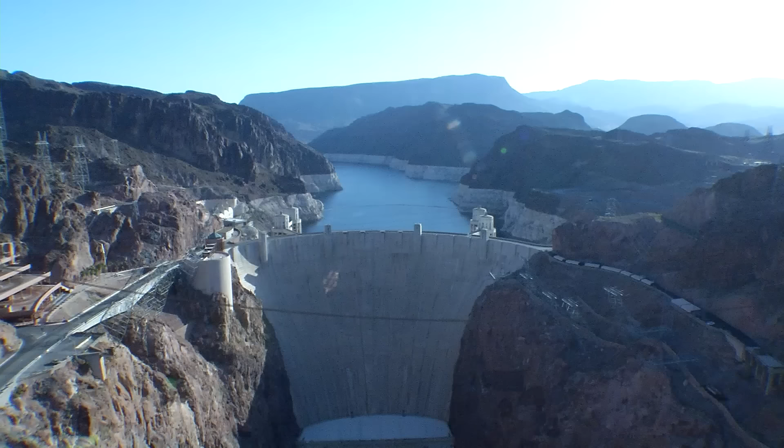Along its course, a series of dams and reservoirs manage the river's flow, delivering water for nearly 35 million people and more than 5 million acres of irrigated cropland. Many communities are dependent upon the life-giving waters of the Colorado River, but none more so than the city of Las Vegas. Las Vegas is located in the Mojave Desert.

Without a reliable water supply, Las Vegas simply can't exist, so there's nothing more important than being able to guarantee that. Nearly 90% of the Las Vegas water supply comes from Lake Mead Reservoir, fed by the Colorado River. But Lake Mead's water level has been dropping, putting Southern Nevada's water system at risk.

Since 1999, the Rocky Mountains have been going through a very severe drought. We've always known that droughts are part of the natural cycle. What's most concerning about the current situation is that we're seeing a natural drought combined with the beginning of climate change.

The lake is now at less than 50% of its capacity, the lowest level since the reservoir first filled in the 1930s. The low water levels of the lake threaten critical infrastructure used to access and deliver water to Southern Nevada. If the lake continues to drop, our upper two intakes will no longer be able to pull water.

So in the face of these declining reservoir elevations, we're constructing a third intake into Lake Mead in order to access water from the coldest, deepest part of the lake. With the drought continuing unabated, construction of the third intake is a race against time.

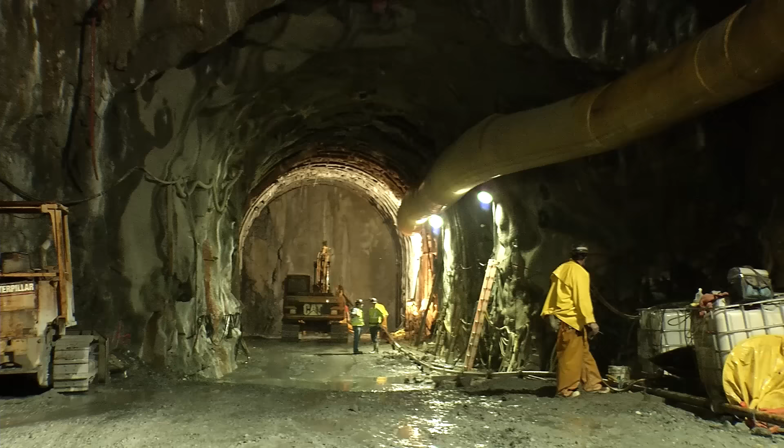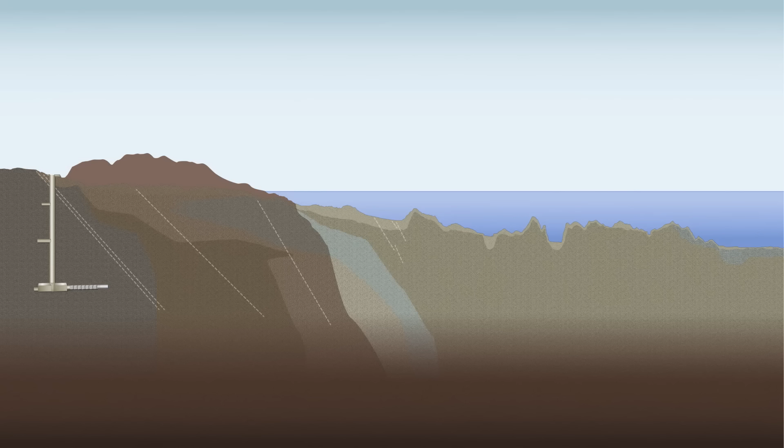Intake number 3 will draw water near the bottom of the lake. Its construction will be one of the most challenging tunneling projects ever attempted. To build it will require excavating a shaft more than 600 feet deep. A tunnel boring machine will be lowered to the bottom of the shaft and excavate a route 3 miles long under the lake.

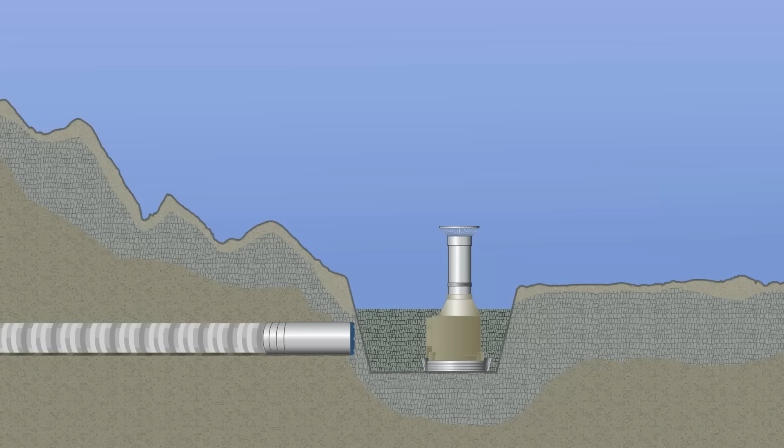The intake structure will be built suspended from a barge near shore, then tugged out on the lake, lowered into a pit, and secured with concrete. Finally, the tunnel boring machine will connect with the intake structure, allowing the lake water to flow through tunnels and pumping stations to reach the water treatment facilities.

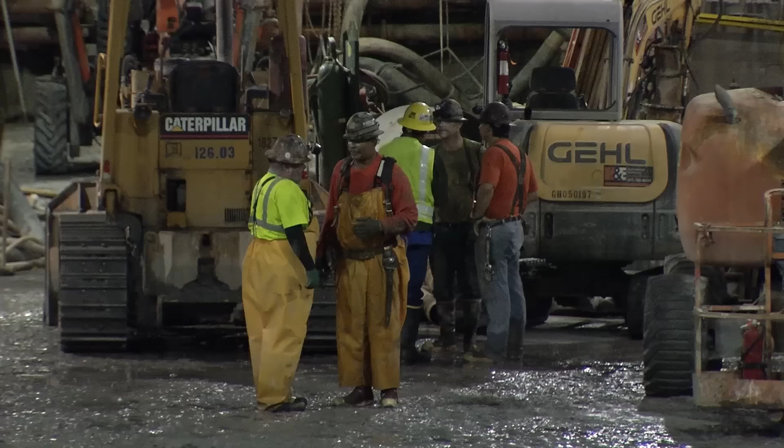Each phase of the project is a daunting challenge, made all the more difficult by the intense pressure working so deep underground and below Lake Mead. The tunnel boring machine will face up to 15 atmospheres of water pressure, higher than any previous tunneling project has ever encountered.

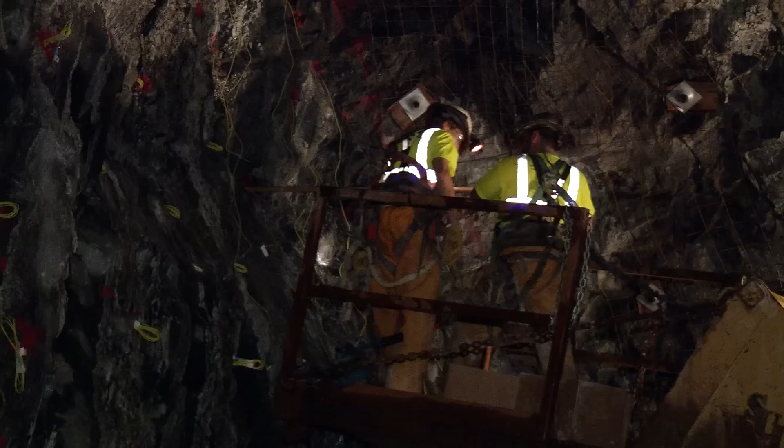The geology of the area poses another great challenge. Unstable rock conditions riddled with faults act as conduits for water to travel into work areas. This concrete, this tremie concrete... To overcome the obstacles of the harsh environment, it will take ingenuity and creative solutions. But it is the perseverance of crews working day and night over the course of 7 years that will lead the team to success.

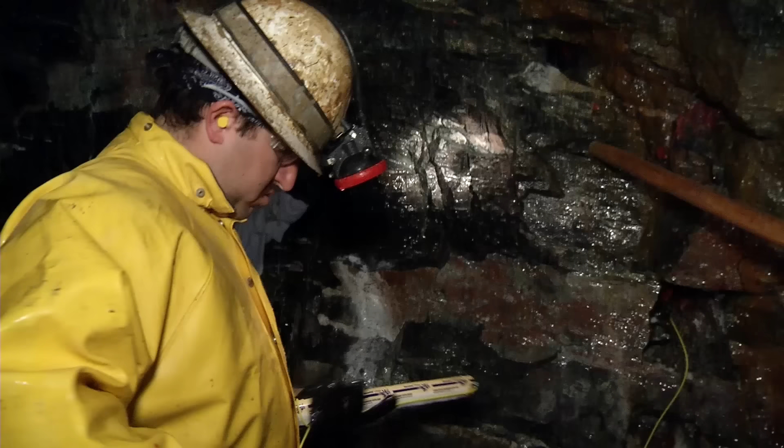Working underground is dark, dirty, and wet. It takes an exceptional mindset to do this work. I like this kind of job. I love being underground. Drilling and shooting dynamite, TBMs. I like it.

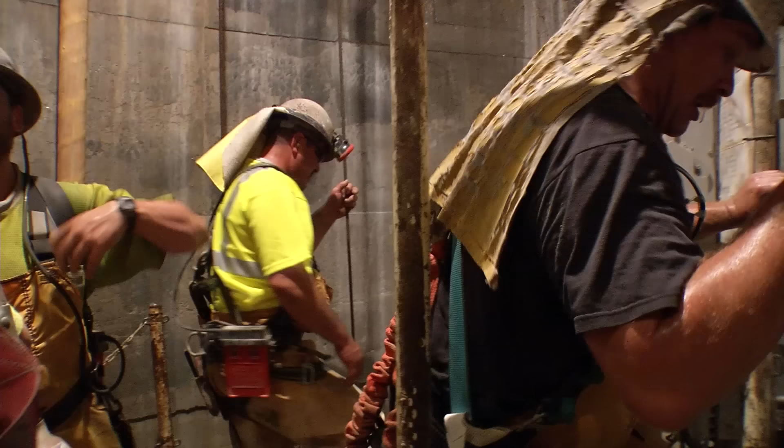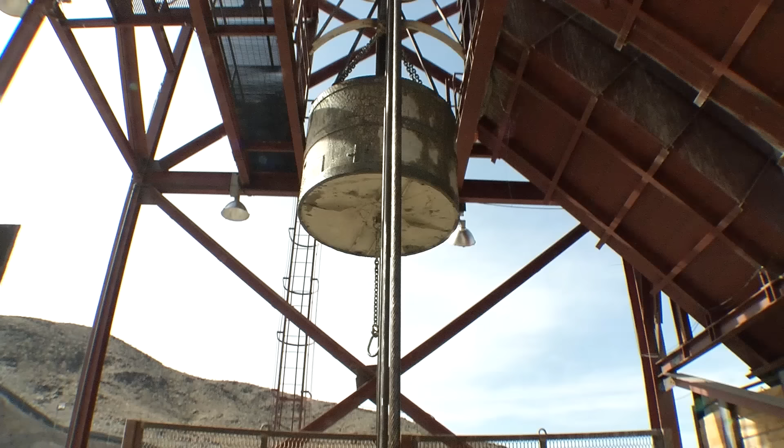To excavate the shaft, workers apply a drill, blast, and muck technique. The first step is to drill long holes into the rock face. Workers then insert dynamite into the holes. After the dynamite charges detonate, the crews muck out the rock debris and load it into buckets for removal to the surface. Bucket by bucket, the workers slowly make their way deeper into the earth. Each bucket holds 8 cubic yards of rock and weighs 35,000 pounds when loaded.

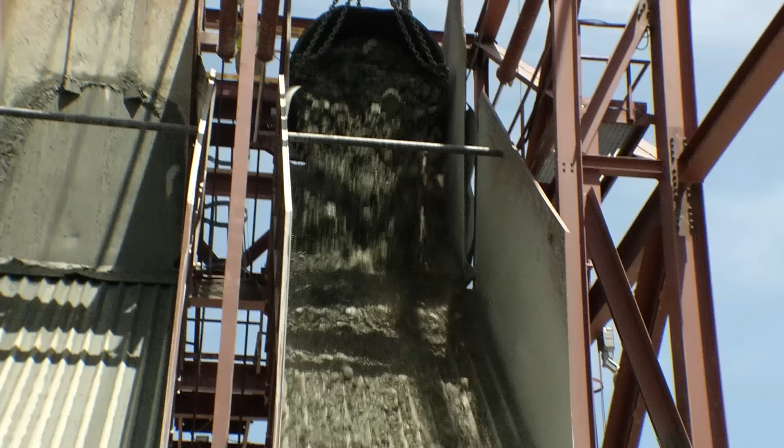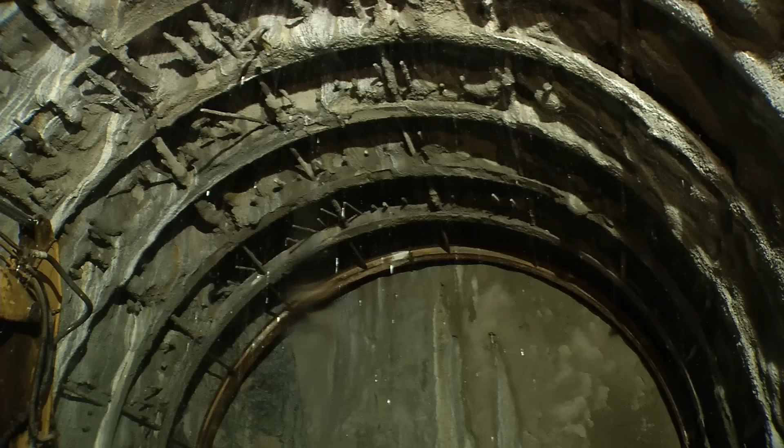Working day and night, it takes over a year to reach the full depth over 600 feet below ground. At the bottom, workers excavate a large chamber and starter tunnel, which makes room for the incoming tunnel boring machine. Then, on June 28, 2010, the workers get a shock.

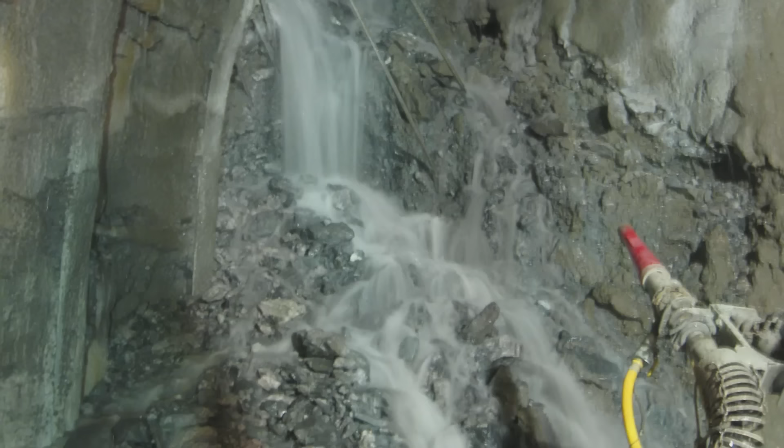There were like 5 of us down here, working on the ground. And I seen the water changing color. That's when I knew something was gonna happen. So I called those guys on the top. I had that basket ready. A torrent of mud, gravel, and water surged into the work area.

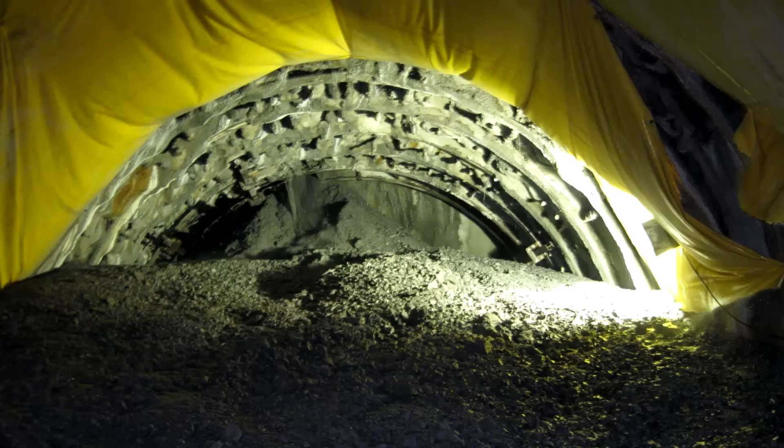I'm a little bit scared. Well, I won't deny it. Everybody was scared. But thank God we got my guys out. Everybody's safe. That's what mattered.

Over the next 4 days, water and approximately 6,600 cubic yards of mud and gravel flowed into the starter tunnel, burying equipment and bringing the project to a standstill. I personally have never seen anything like this myself.

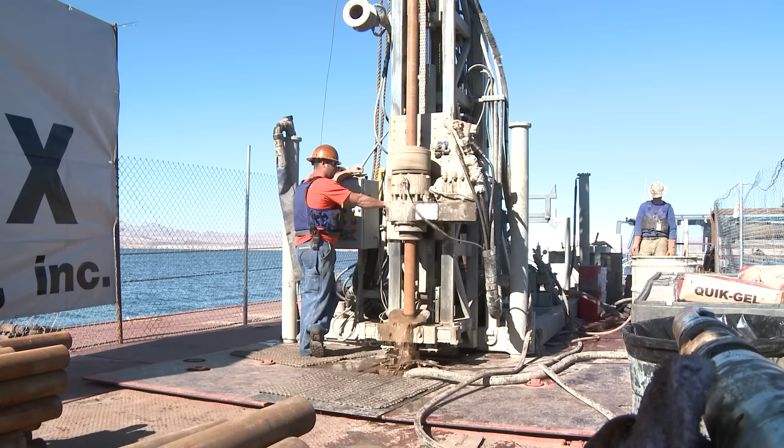Engineers launched studies to investigate and identified a series of near vertical faults that channeled the material into the work site. This just goes to show that despite your best efforts and the best information you have on hand, things that are underground are almost impossible to completely predict. And Mother Nature is a powerful entity, and sometimes she wins.

The inflows are a major setback. Crews spend the next year recovering and pursuing a new route for the tunnel that skirts the problematic fault zone. Meanwhile, crews excavate another tunnel to join the shaft to the existing tunnels and pumping stations that convey water to the treatment facilities.

On the surface, the German-made tunnel boring machine is assembled. This machine is named Kokopelli, which is a southwestern Indian spirit, or god, if you will. Kokopelli is a technologically advanced and robust piece of machinery designed specifically for the conditions of this drive.

Normally a tail shield could be as little as 1 inch thick. This one happens to be 3 inches thick just because it's got to be able to withstand that pressure. And that goes throughout the machine. All the steel structure of the machine has to be built in order to take that pressure. So this machine weighs about 900 tons.

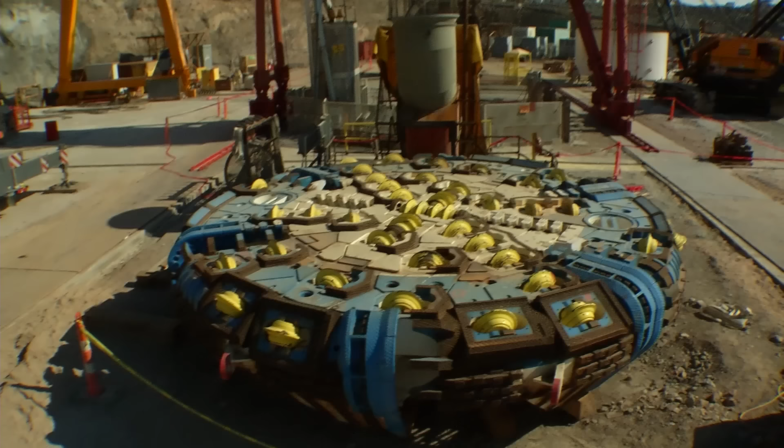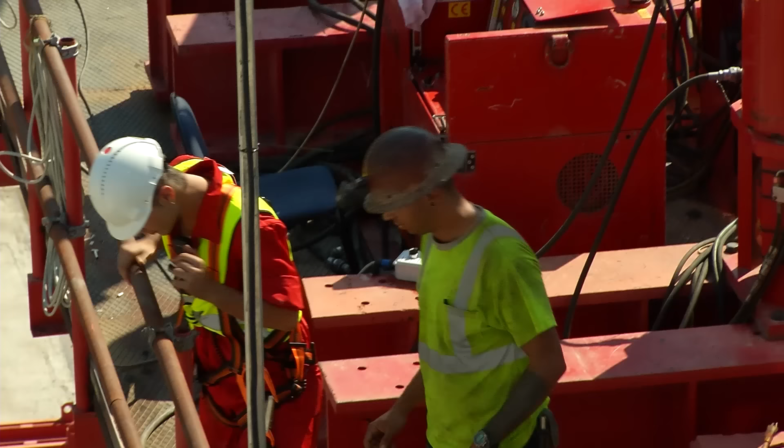Lowering the TBM sections down the shaft requires precise maneuvering. The shaft is a 30-foot diameter and the TBM is 23.5, but if you look at it as a square from above, it's only got about 1 to 4 inches of clearance. So it'll take about 12 hours to descend to the bottom.

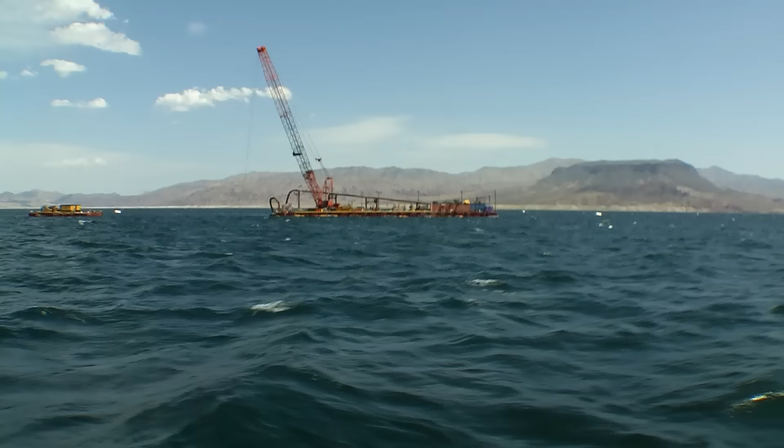While underground crews prepare the TBM at the beginning of the route, marine crews are busy working at the intake site. 2 miles offshore, they are excavating a deep hole in the lake bed where the intake structure will be placed. Working out on the lake comes with its own set of trials. Part of the challenges that we face is the weather, the high winds, which also create 3 to 4 foot seas when it's 30-mile-an-hour winds like it is today.

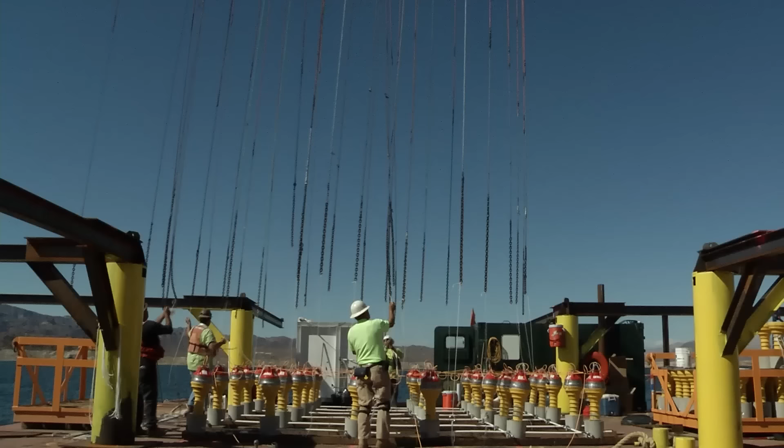Marine crews have removed 14,000 cubic yards of overburden from the lake bed floor and are now blasting away the bedrock. Over the course of a year and a half, they will detonate 24,000 charges.

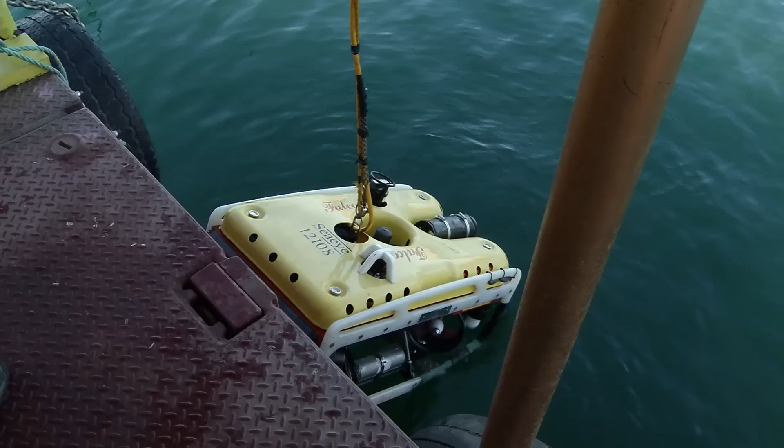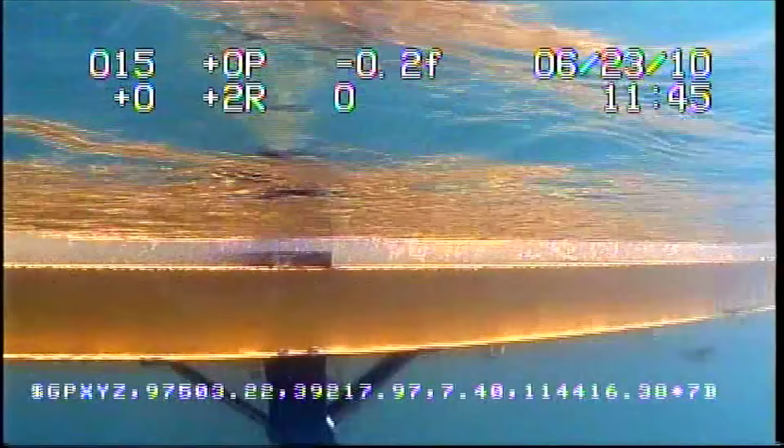Throughout the marine work, a remotely operated vehicle acts as the eyes of the crew working above. The ROV makes it possible to avoid dangerous deep water dives during the intake operations. It's basically a camera platform that we can fly around and observe what's going on. It has a small manipulator on it that allows us to do a certain amount of operations with it. Today, that comes in handy.

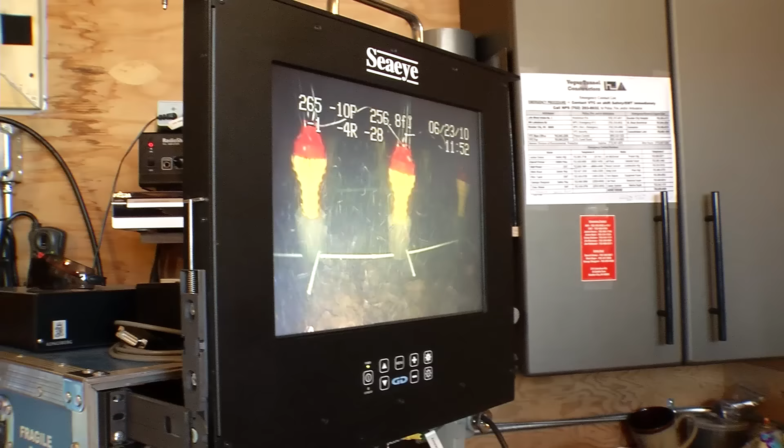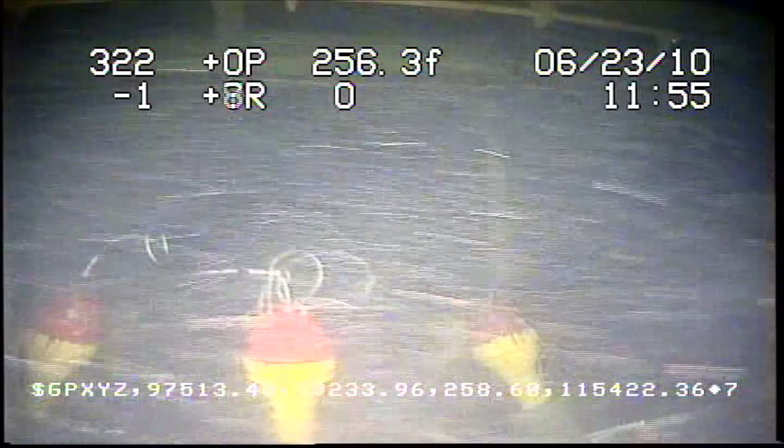Okay, get ready to drop the charges. Going to be checking the detonation cords and make sure that they're all connected, that nothing came loose while we were coming down. Whoops. A detonation line of one of the charges has become caught on an edge of the transport frame. If the ROV can unhook it, the crew will save hours.

This should go pretty easy. Mike, is it wrapped around it or just hung up on the little lip? Okay, it should be clear. Let me creep up it a little bit. You ready? Fire in the hole! Every day, the hole underwater becomes a little deeper and wider.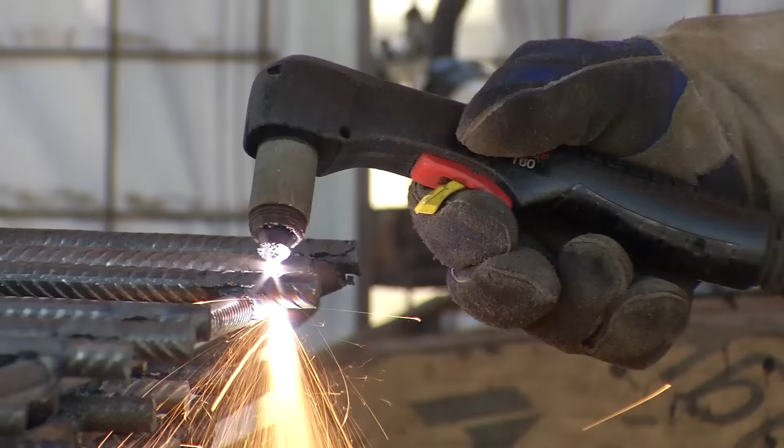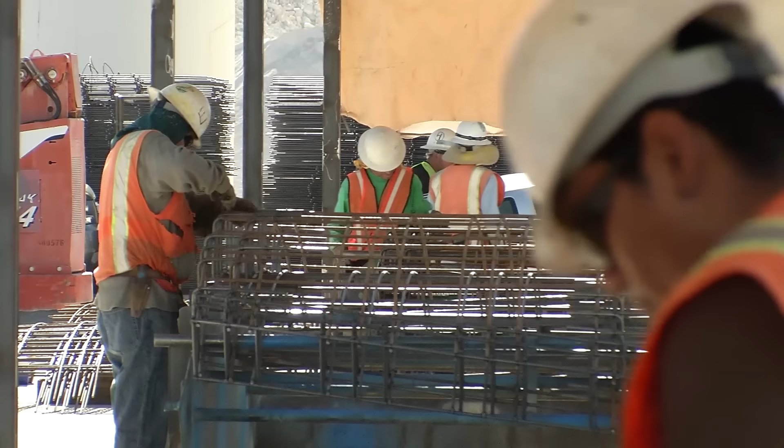Off-site, crews are manufacturing the concrete ring segments that will be installed by the tunnel boring machine and serve as the final liner of the tunnel. The segments are manufactured to tight tolerances. They must vary in size by no more than 1.5 millimeters.

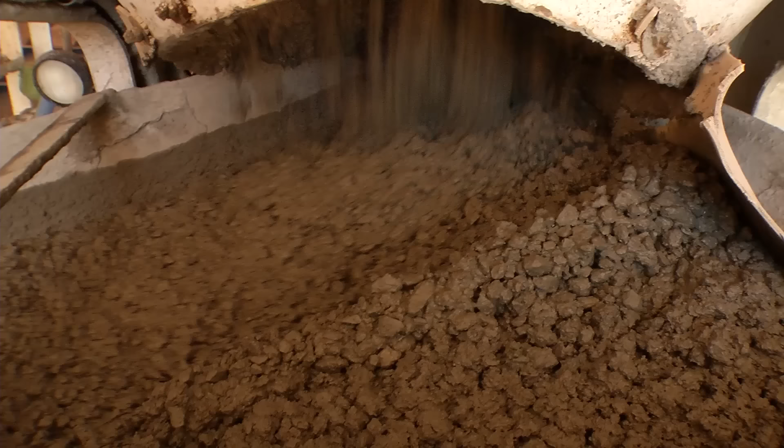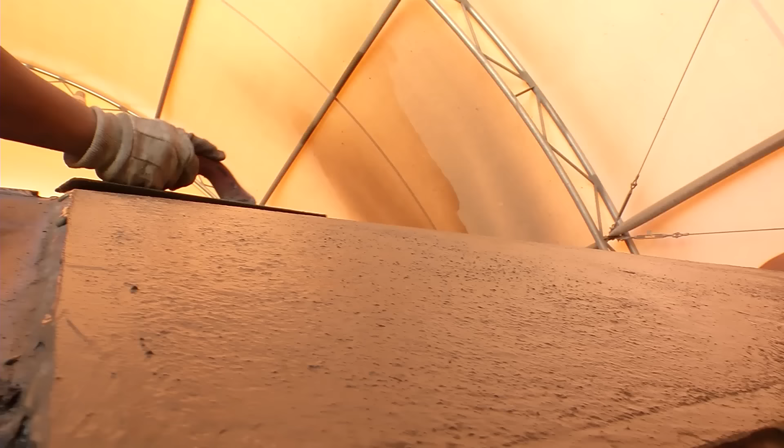The precise size of the segments is crucial to the performance of the tunnel, as the rings must fit together and create a watertight seal that is strong enough to withstand the intense hydrostatic pressure. In all, over 14,000 segments will be cast for this tunnel drive.

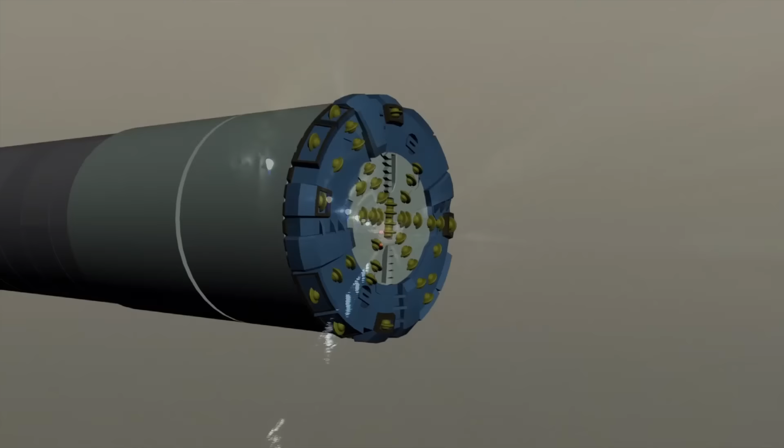600 feet underground, the TBM Kokopelli has begun mining. The concrete ring segments will make up the tunnel liner, installed within the protective shield of the machine. When ground conditions are favorable, meaning the rock formation is cohesive and groundwater minimal, the machine will mine in open mode. The material is carried through the machine by a screw conveyor and deposited on a conveyor belt to transport it through the tunnel.

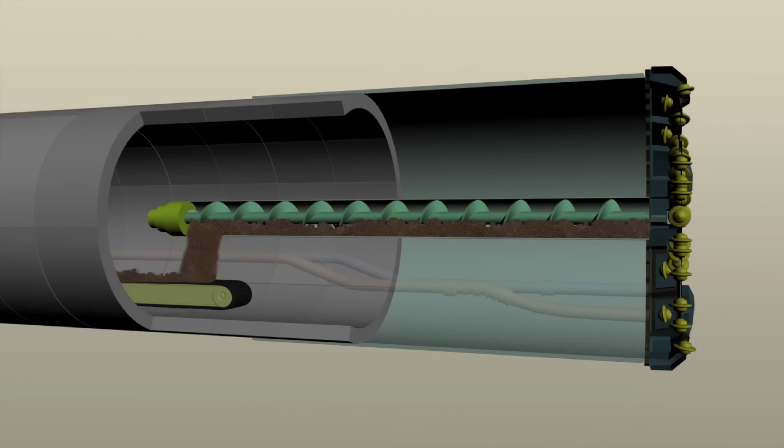When ground conditions are poor and groundwater is flowing at high volumes, the TBM can switch into a closed or slurry mode. In closed mode, bentonite slurry is pumped to the face of the machine, and the excavated material mixes with the slurry and is pumped back to the surface where the bentonite is extracted and reused. Every 6 feet, the TBM stops and crews work to install another concrete ring.

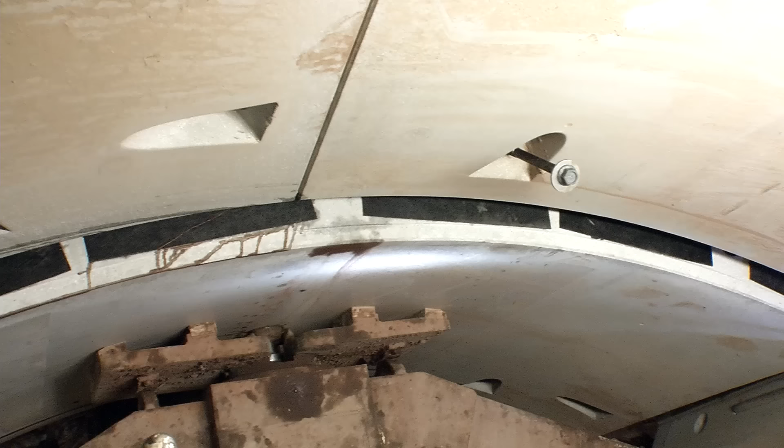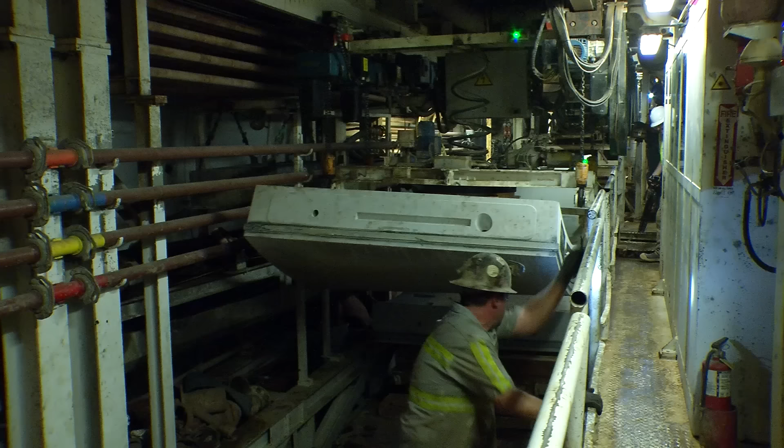The tunnel boring machine pushes off the newly completed ring to move itself forward, then excavation begins again. Right now we're having problems with our water. Dwayne West is one of 3 qualified operators of the TBM. The hardest part of this job is watching everything all the time.

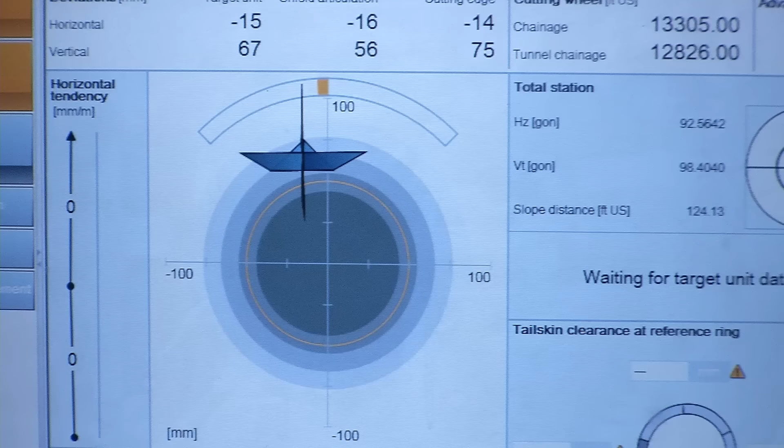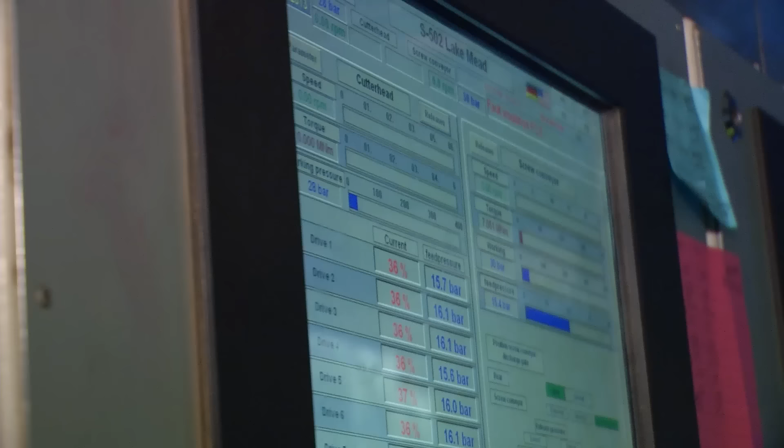I mean, you've constantly got to be watching your pressures on everything, your grout, your thrust cylinders, your articulation, your cutter head. Then you're looking at the VMT to make sure that you're staying on line and grade. So you're steering and making adjustments there. And when there's problems, trying to figure out the problems. Interpreting the pressures on your screens will tell you what the ground conditions are like outside. Sometimes it's very hard to interpret that information.

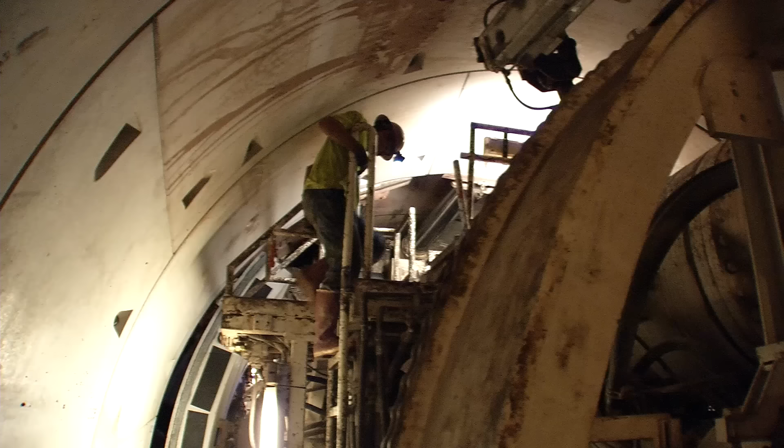Hello. Even under ideal conditions, the TBM operator's job is stressful. There's a restriction somewhere because we're flooding everything down here. It's blowing off. And on this drive, conditions are proving to rarely be ideal. Yep, people are working on it, Chris. It's been very difficult because of the pressures. It's the highest pressure the machine's ever been at in the world to mine through the ground.

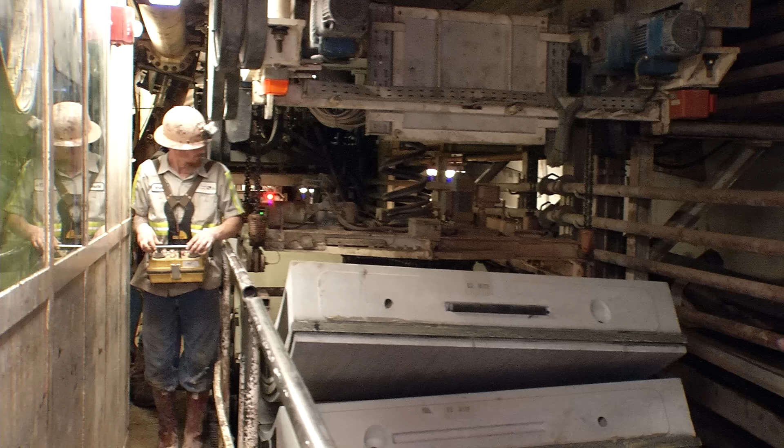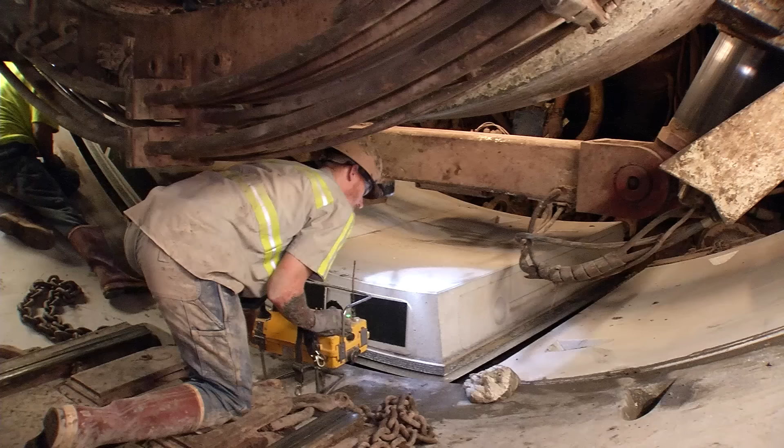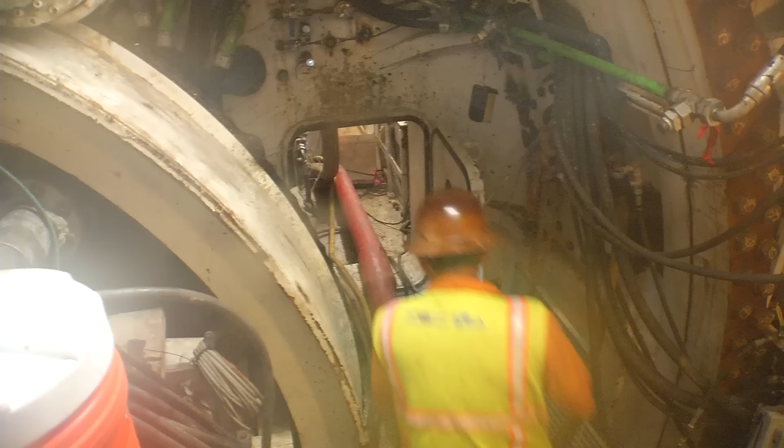Due to poor ground conditions and high pressures, the team is unable to access the cutter head for routine maintenance, forcing the cutters to work much longer than they were designed for. Finally, the TBM enters better ground conditions, allowing for an inspection of the cutter head. Groundwater flows through at a rate of 4,000 gallons per minute. Working in these conditions requires heroic effort.

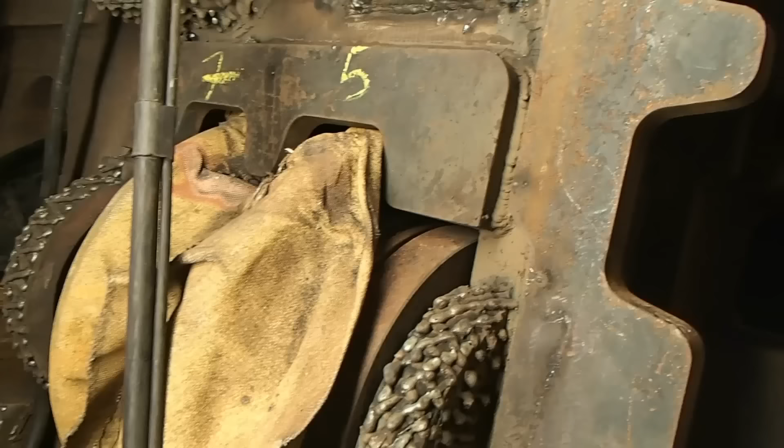The team makes a shocking discovery. The center part of the cutter was completely destroyed. Some of the structure of the cutter head was bent and damaged from the overheating and the pushing. This machine pushed a lot. Workers excavate a narrow niche to access the front of the machine, and welders are able to rebuild the cutter head.

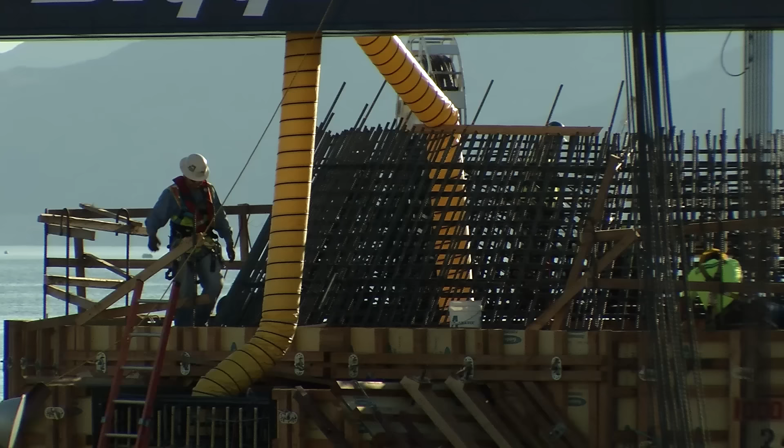On the water, marine crews are building the intake structure, which the TBM will eventually bore into on the bottom of the lake. The structure is suspended in the water from a barge around its perimeter. Long cables attached to each corner and threaded through strand jacks will serve to lower the structure to the bottom of the lake.

The intake structure is complete, and the marine crew gathers before dawn to prepare for a big day. We're bringing the intake structure out today. It's 2 years worth of planning, 2 years worth of work, 2 years worth of digging a hole 60 feet deep at the bottom. It's a pretty significant thing.

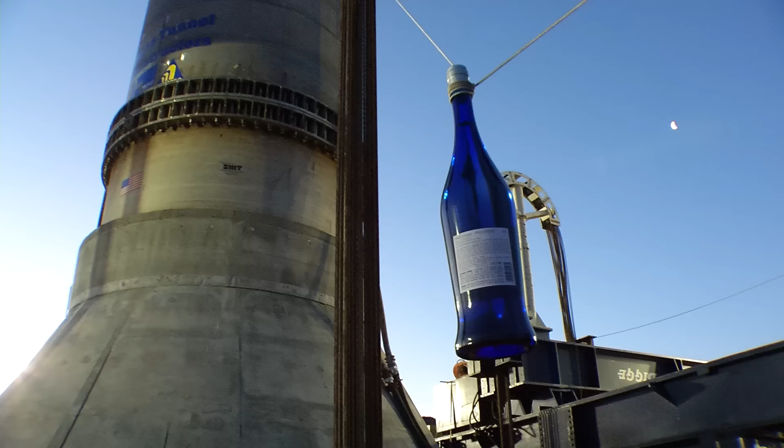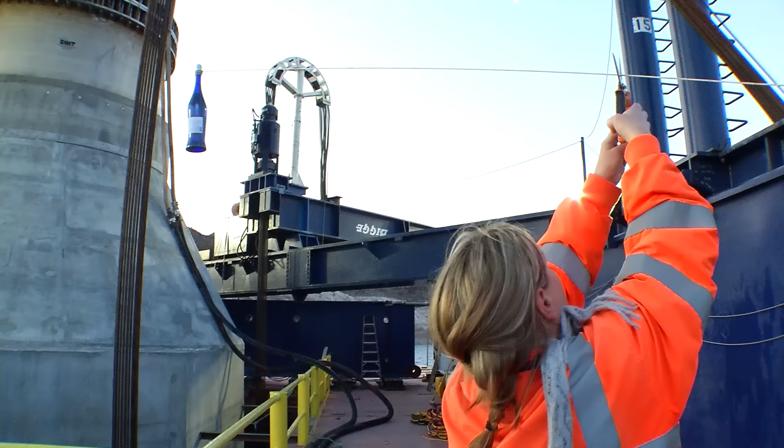Maritime tradition requires a dedication before the voyage begins. If that bottle doesn't break, I have to go for a swim to reverse the bad luck. I've got all the trajectory on it I can get on it, Chief. The anchors are cut, and it's time to push off.

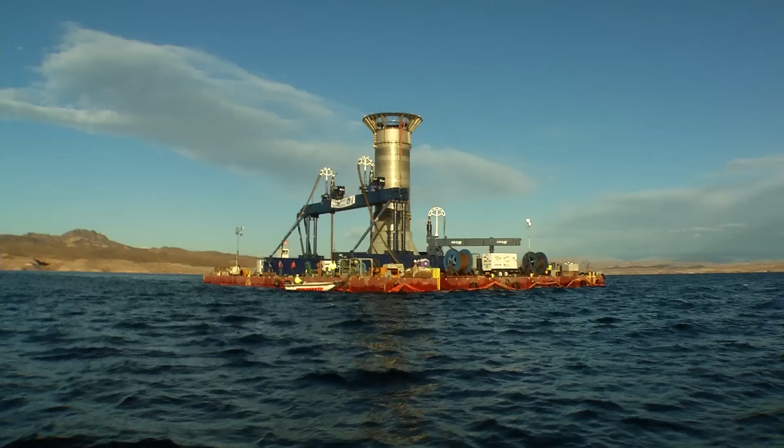At more than 90 feet tall and 1,400 tons, moving the structure in the lake presents quite a challenge. All eyes are on the weather. The barge is a big sail, and the wind will push you off course. And if it pushes you off course, then you run a risk of running aground. As the barge rounds the cove, the wind suddenly picks up, forcing the tugboats to operate at full power to stay on course.

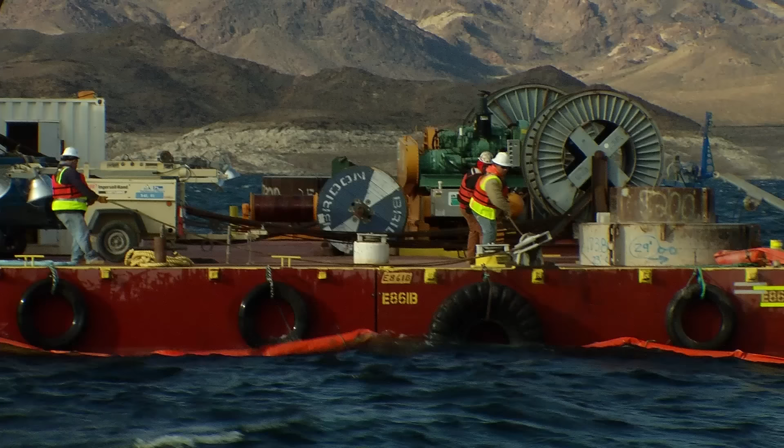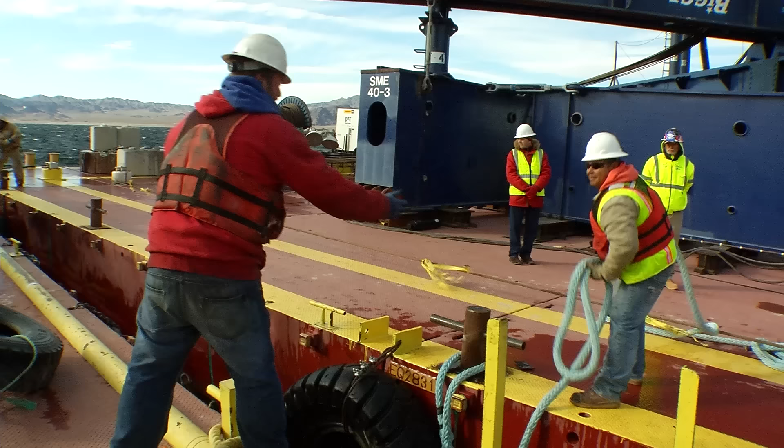Despite the wind, the intake structure safely makes its way to meet up with the crane barge on the lake. Great job on bringing this thing out. Wasn't exactly the best conditions, and y'all did a great job on it. The intake structure begins its slow descent to the bottom of the lake.

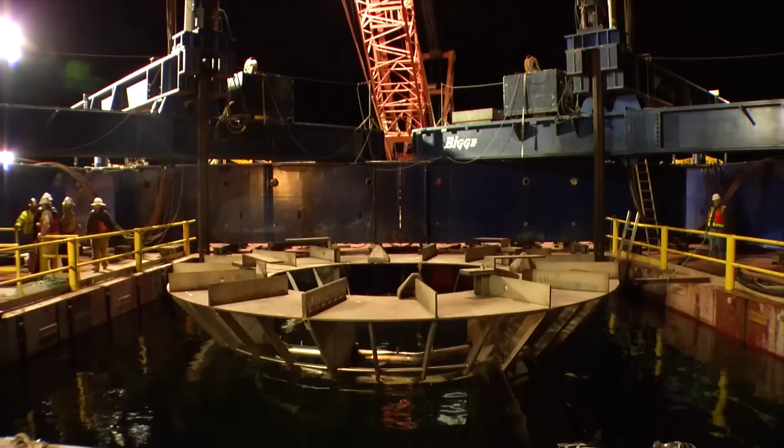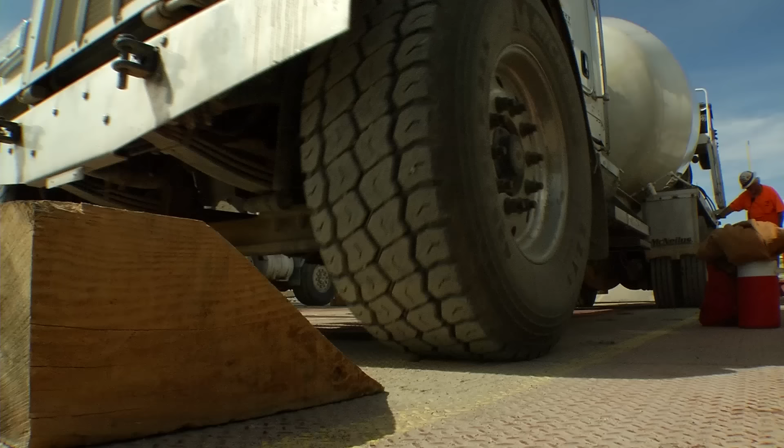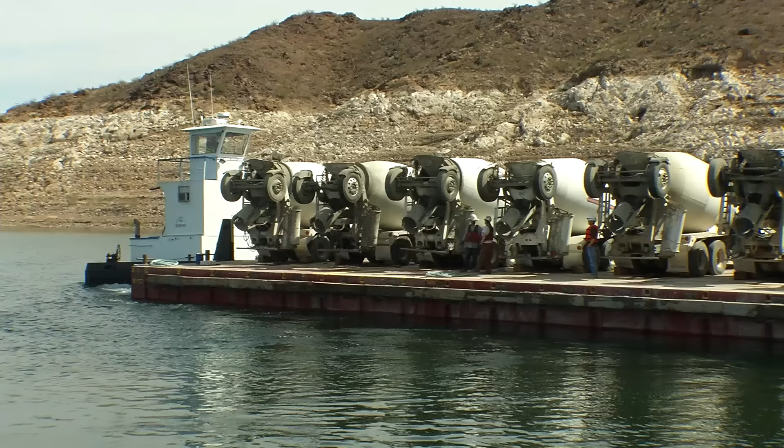To secure the intake structure to the lakebed floor requires pouring 11,000 cubic yards of concrete at a depth of 350 feet. The logistics of such an undertaking require new techniques. The project is unique in itself. It's never been done before anywhere in the world. It's at a depth that concrete has never been placed, not in a tremie system. We had to take everything in and put it into one system and then fix problems as they came along to make each phase work.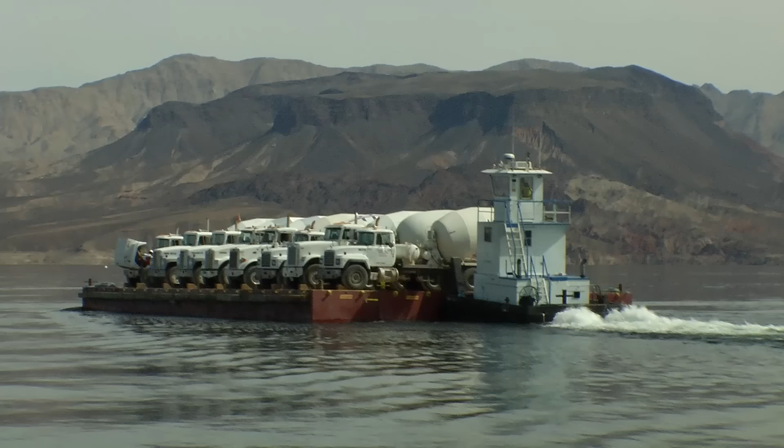Engineers worked for 18 months to develop a method of delivery and a specific concrete mix designed for the unusual environment. The concrete has to stay very fluid during the transportation, and getting it out to the placement barge with the ready mix trucks is very difficult because it takes around 2 hours to get it there. So after the 2 hours, the concrete has to be workable so that it will flow down the 350-foot tremie pipe.

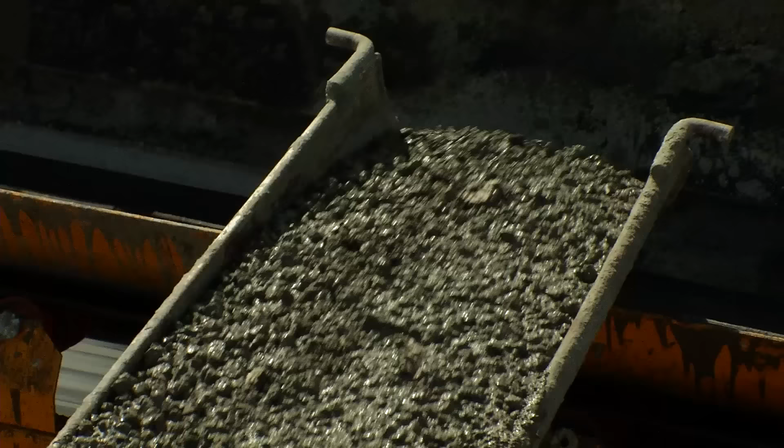The pour itself is a marathon, running around the clock for 11 days straight. 3 barges loaded with concrete trucks rotate continuously from the shore to the site on the lake. As if the task was not challenging enough, Lake Mead throws in one more trial for the crew to overcome.

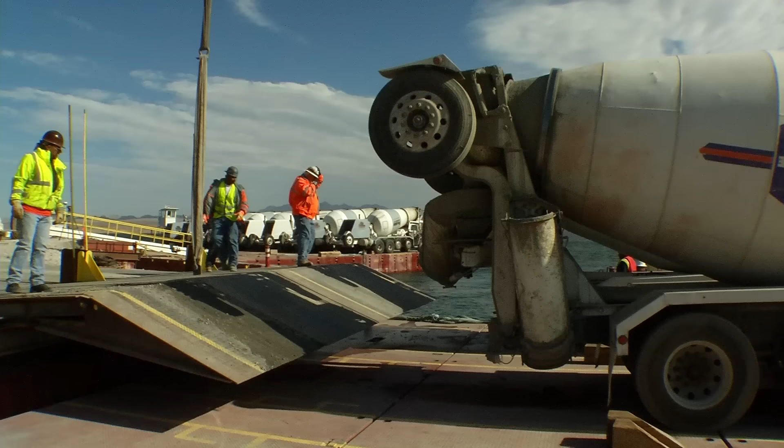5 days into the pour, the wind picks up. It's supposed to be 75 miles an hour. The tugs can't push the barges like that. It's too much weight. Today's gonna challenge us. All right, guys. Crews wait out the worst of the storm, and the barges are soon back to work.

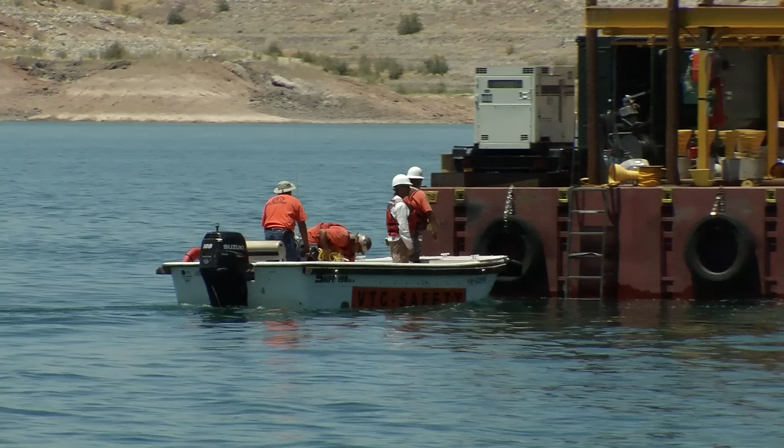Finally, the base of the intake structure is fully submerged in concrete. For the marine crews, their job is complete, and they depart knowing they've had a hand in something momentous. Being a part of this job that's never been done before, it's gonna be like the crowning moment in my career. That's kind of special to me. I like it.

After 3 years of tunneling, the TBM Kokopelli is approaching the end of her journey. Took so long. We're right at the end now. All right, good morning, guys. Right now we are halfway through push 24-25. When we hit ring 24-27 is when we should be pushing through the intake structure. Very close, very close. All right, guys, let's go. Let's do this. The hole through has been a long time coming.

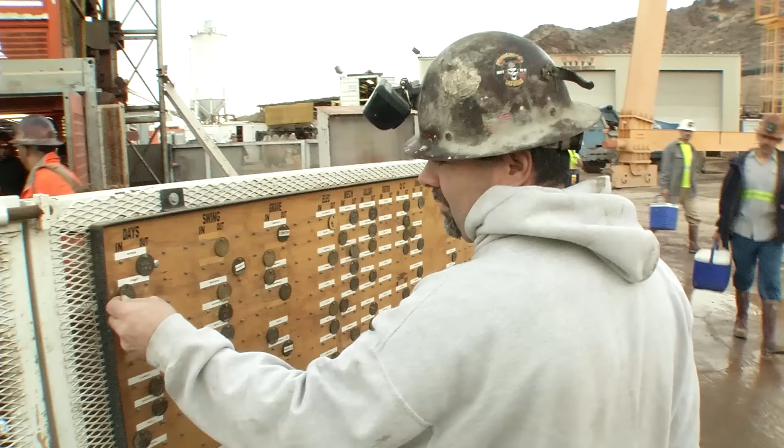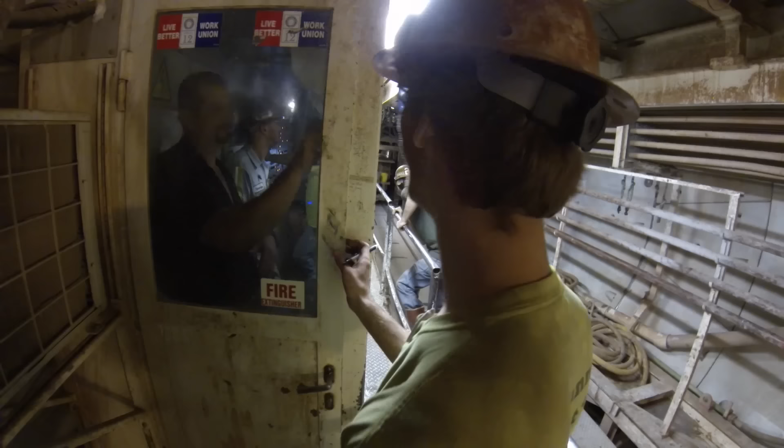You know, thinking about this project, the end seemed so far away. It never really seemed real. The crew below advances the TBM at a cautious, slow pace. We'll pull a couple up and lay them back up there so we can look at them. Above and below ground, on land and from the water, all eyes are watching for signs. At the separation plant, pieces of fiberglass rebar prove that the TBM is boring through the soft eye of the intake structure.

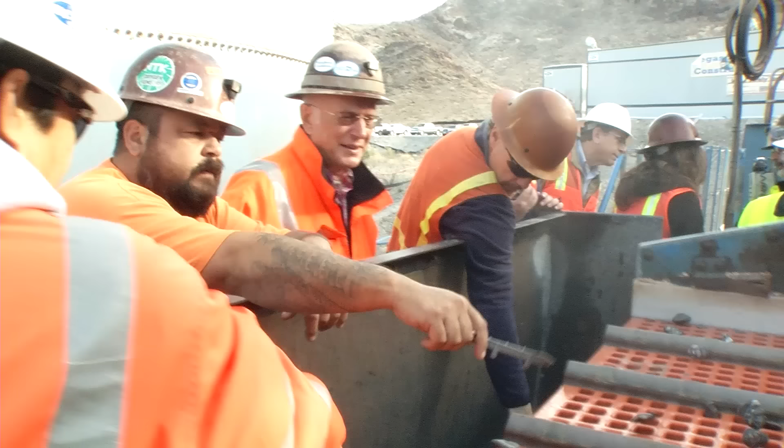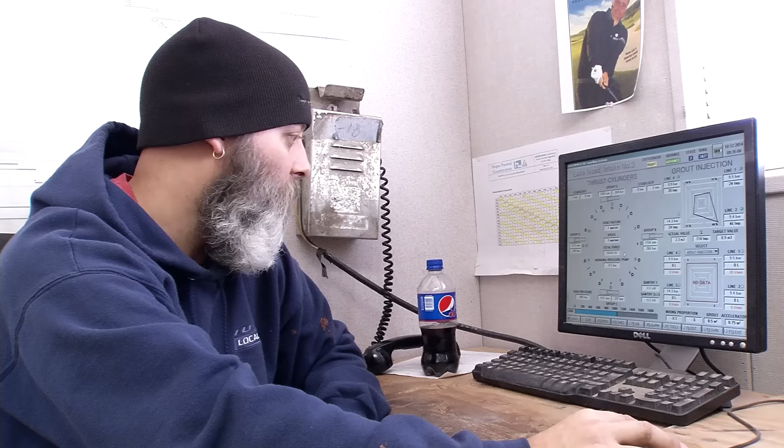I'm kind of waiting for this total force. That should drop down about 5,000 kilonewtons when we hole through. That's when we'll know. A call comes in from the marine barge on the lake, where workers report seeing bubbles rise up through the water. Did you get some more bubbles? Almost there. Almost there.

At last, there is no denying. That's it right there. The TBM has holed through into the intake structure. Yes, sir. We're broke through. It's a done deal. Yeah. Along the top, along the top. Good job, everybody. It's over. It's over. Finished. After 6 years, it's over, man. Long time coming, but it's done. Yeah, good job. Overtime for everybody.

Very proud of what they've accomplished. After all the hard obstacles that we had on this job over the years, people that work together to get it up, to get it done. Because without them, we would go no place. Feels great. Feels real good.

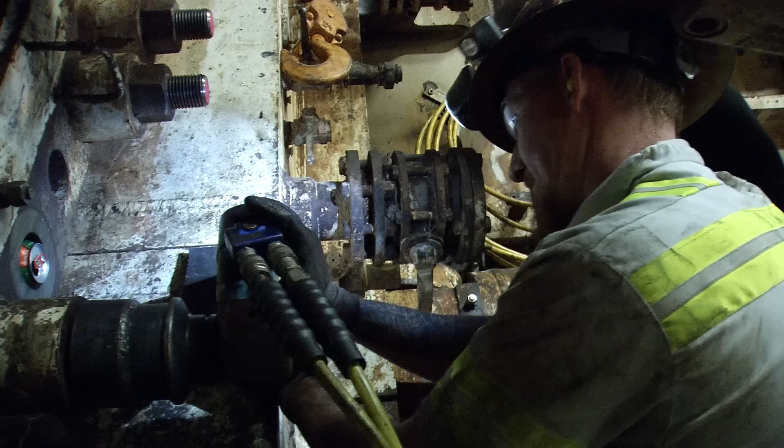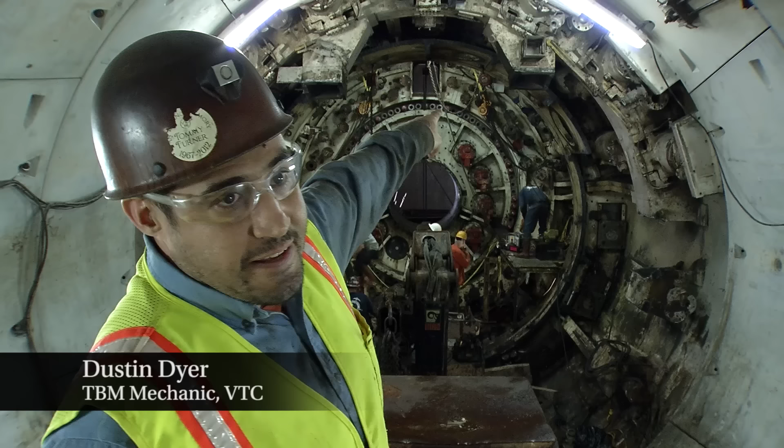All of the preparations that went into excavating the tunnel are now reversed. All this structure will be cut out. The cylinders, the main bearing structure, everything but the outer ring of the shield. The outer ring of the shields will be welded together and it'll actually be part of the tunnel. The TBM pieces, miles of pipe, utilities, and rail lines are hauled up the shaft. The tunnel is ready. To equalize the pressure from the lake, the tunnel is filled with water from the surface.

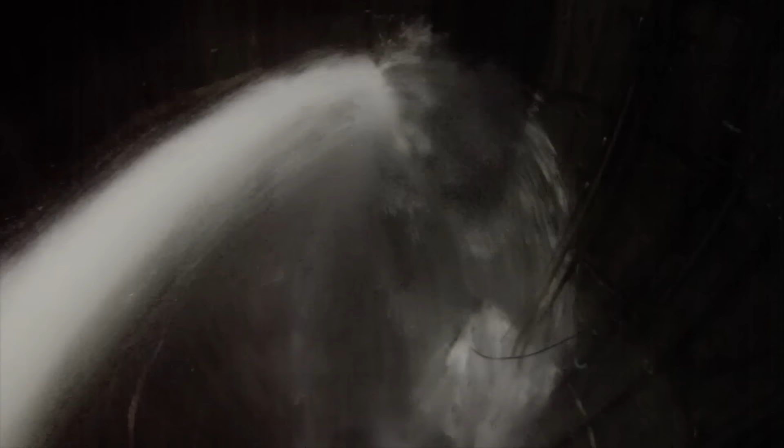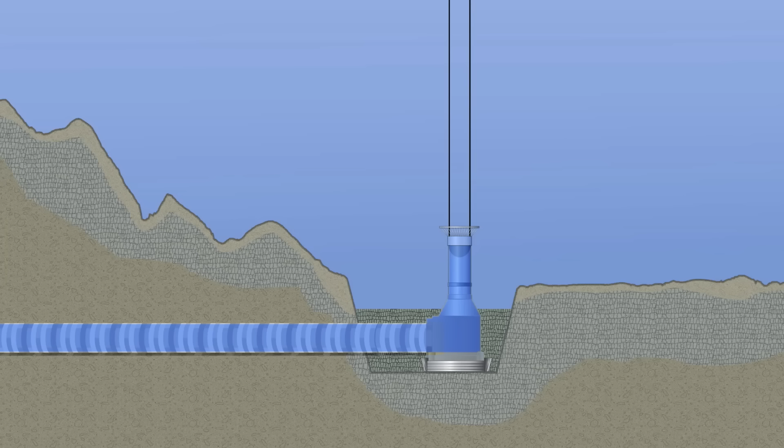There is just one last milestone left in the project. A temporary bulkhead in the intake riser is all that separates the lake from the new tunnel. Today, it's coming out. So, you ready to bring her out? Let's do it. Hey, Mike, go ahead and come on up slow. You're about a quarter of the way out. Roger, coming up. She's clear, Mike. You're clear to the surface.

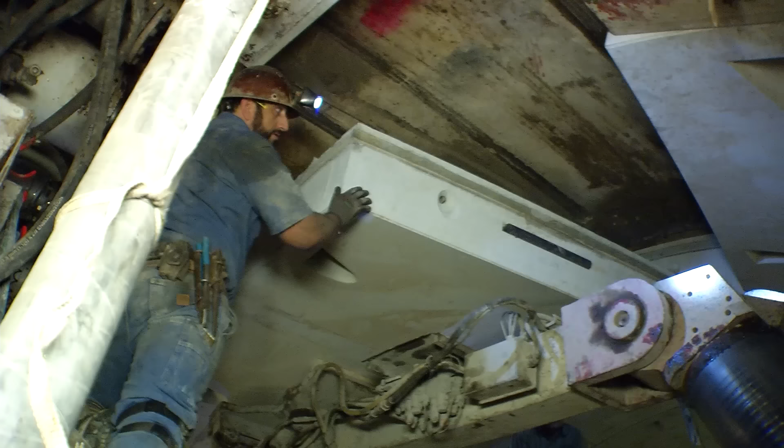All right, Carrie. Today was a big milestone. Finally, after almost 7 years, we can call it complete. This was a very difficult project. We've set the world record for mining at the highest pressure with a tunnel boring machine in the world to date. We encountered variable ground conditions, unstable ground, and very high pressures. So we had to really fight for every inch along the way.

But it was really the workers, the contractors, engineers, everybody that's involved coming to work and bringing their best and putting their heads together and working through these challenges. That's why it was such a success.

Uncertainties of drought fueled by climate change will undoubtedly continue to challenge the arid Southwest. But by looking ahead and planning for the future, the Southern Nevada Water Authority is mitigating some of its impacts. For the people of Las Vegas, the years of hard work and ingenious construction of the third intake have secured a reliable delivery of water to their homes, the very lifeblood for a community in the desert.